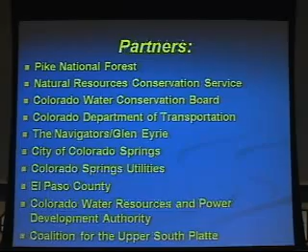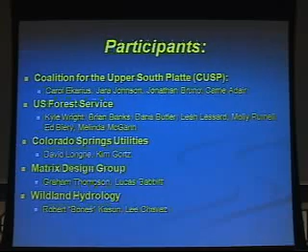So we want to thank those who have made it possible to do these studies and to bring the combined expertise, information, and experience that we've had over the years to your area and your watershed. Also in the field, the people who helped us, especially associated with CUSP, U.S. Forest Service personnel, Colorado Springs Utilities, Matrix Design Group, as well as Wildland Hydrology. These are some of the additional names, some of them sitting out here right now, who put tracks up these channels and hillsides to help put a lot of these numbers together.

As you know, we're looking at a little over 18,000 acres. You're all familiar with the degree of severity and the impacts. Our goal of the assessment we did initially, and then the subsequent conceptual design we're going to talk about today, had to do with enhancing the hydrologic recovery of the watershed to promote sustainable watershed function, trying to speed up recovery as well as reduce some of the anticipated impacts, some of which you've already seen.

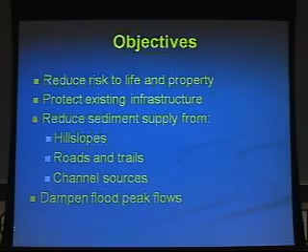The key or specific objectives associated with the design are based on reducing the risk to life and property, protecting infrastructure, reducing sediment supply from hill slope processes, from roads and trails, as well as the channel process, and trying to dampen flood peaks, reducing the magnitude of that big runoff response to just moderate precipitation events that we've already seen.

So the following questions - anytime you're involved in this type of work, a lot of questions come about: what, when, who, why, and all this stuff. I'm going to try to answer these questions as I go through a series of slides that will give you some background in terms of where we started, the questions that were addressed to us, and how we've gone about data collection and analysis to come up with some answers. Some of these questions are not simple.

So the first question: what are the impacts and potential adverse consequences associated with post-fire conditions? Second: what can we do to offset some of these problems? Can we do anything? What kind of treatments? Number three: how effective is anything we do going to be? Is it going to work? Next is, where do we start?

We've got 18,000 acres. Do you start at the top of the watershed, the furthest one north? How do we make that determination? Next, how much is it going to cost in terms of an approximate unit cost for different types of treatments or activities we would anticipate? And when can we start?

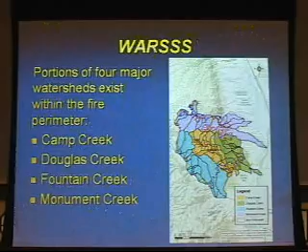The WARSSS analysis identified 4 major watersheds, which we broke up into sub-watersheds: Camp Creek, Douglas Creek, Fountain Creek, and Monument Creek were the main broad watershed basins. Within each of those basins, there are 89 sub-watersheds broken up, involving over 237 miles of stream channels, of which a majority were hiked and mapped and assessed in detail. We'll talk about more of that as we continue on.

Some of the change we've seen already associated with the hydrologic response: we're finding that just moderate storms, like a 2-year precipitation event, can generate a 20, 30, or even 40-year flood because of this response, which is alarming, as it should be. That's one of the things we have to address dealing with some of our treatments.

The effects of mud flows and sediment, as well as floods coming down into your neighborhood, have prompted a lot of direct issues, as they should, which again prompted a lot of our studies.

The average annual water yield - Jim Nankervis ran this model looking at the effects of change in stand conditions, how much of the watershed was burned and what was hot burned. So we actually look at the change in water yield as a result of the fire effects. As we increase water yield and increase flows, we have to look at the conveyance system, the stream channels, as well as rills and hill slope process that have to accommodate the increased flow.

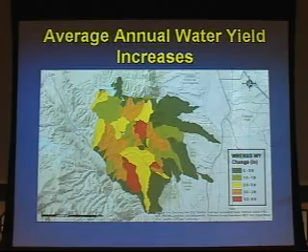The thing we found in our studies and evaluation, and other people, including CUSP, who have evaluated 10 years of post-fire impacts on the Hayman fire, have found that the impacts persisted a lot longer than what was anticipated, or that they were told that within 2 to 3 years it should be back to normal. Of course we found out that's not the case, because the increase in flow is going to last decades - maybe 70 to 80 years before we get back to pre-fire conditions, because of the drouthy nature of these soils and your precipitation within this area.

It's hard to get the site back in terms of mature conifer tree cover. The point is the increase in flow is going to be with us. It's not going to change a lot. The flood peaks are a reality for the future.

We can do the most by seeing how well the stream channels and the land system can accommodate the increase in flow. Where we can, we're figuring out some techniques to try to dampen the flood peaks for the more frequent floods, which we've already demonstrated and validated will work. So we'll show you some of that information coming up.

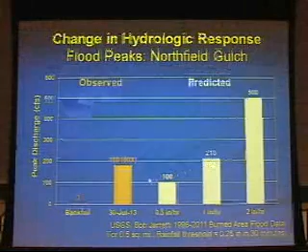The good news, not that it's good news exactly, is that the models predicting runoff response are actually quite accurate, because the observed values were pretty close to predicted. The same 1 inch storm would have generated about 210 CFS, and we observed about 180. That's pretty good agreement.

Not that that's good news, but we have to deal with the knowledge that not-so-big precipitation events can generate big runoff. This is a very key point, because 10 years after the Hayman fire, 86% of all the sediment continues to come at an accelerated rate, causing downstream damage, flood issues, and maintenance problems on highways, and the list goes on.

Those increases were related about 86% to stream bank erosion, from stream channels that have been incised and are blown out and continue to contribute sediment. So the channel process becomes pretty important, and it's something we can help with, in the presence of long-term increases in flood peaks that are going to be with us.

It was up on Coal Basin Creek in Colorado. This is a big debris flow, not from a fire, just a natural process. Now we're going to have an acceleration of that natural process because of what's happened to the vegetation. The thing is, it takes a great mass of material instantly, which is very hard to predict.

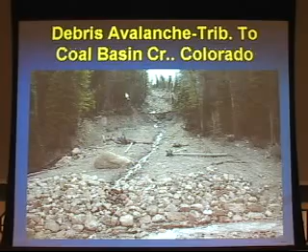Hill slope processes we're going to talk about now relate to surface erosion, rills, and concentration of flows. The more rills developed on the side slopes, the faster the runoff response, which then affects downstream flooding issues as well as sediment transport. So when we're looking at surface erosion, we have to be able to quantify how much sediment is coming from this process that's influencing stream channels, flood stability, etc.

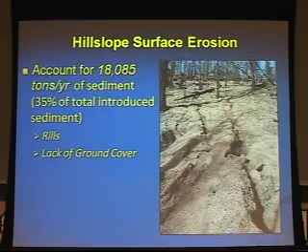So when we're looking for the summary, this is from covering a lot of country, looking at a lot of aerial photography and post-fire analysis. We found that as a result of the work done, 18,000 tons per year of sediment, and that's not with a big flood, that's just normal runoff, normal precipitation events, associated with 18,000 tons over the 18,000 acre area, from rills, concentration of flow, downstream and downslope, and lack of ground cover or surface cover, exposed soils.

So this is some of the numbers that relate to tons from hill slope process by location. The Fountain Creek drainage had 7,300 tons, about 40% of the total of all watersheds. Camp Creek had 4,193 tons, from hill slope process only, 24% of everything. Douglas Creek had 22% of hill slope process, or 4,000 tons. West Monument had 2,500 tons, associated with 14%.

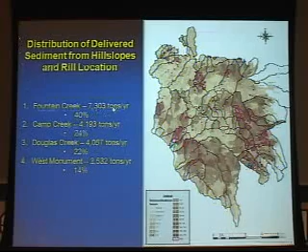Now, these are delivered tons, not just erosion on a slope, but the amount of erosion routed and delivered to a stream. To give you an idea, 7,000 tons is about 730 ten-yard end dump trucks leaving the watershed every year. So this is not just a small number, it can be quite significant, and we have to be able to address these processes as well.

Also, these are mapped areas of high rill densities. These are areas where we see, and the red gives you the highest tons of sediment yield from hill slope process. Why this map is important is you're going to see the distribution of where the sediment's coming from, by different locations and different processes.

This becomes critical because you can go back by individual watershed, by location, and identify where to concentrate your energy. If you can't get equipment on the slopes, you're putting hand crews out there, and you can't just do it on every acre. So this prioritizes what acres are the hot spots, which ones have the highest sediment contribution, where we may be most effective for treating those acres.

So we have this distribution mapped to give us a pretty good idea. The colors you see, the lighter tan as opposed to the darker tan, have to do with the rates. The darker the color, the higher the tons per year of sediment supply by location, by watershed. There's a lot of effort into this, but it becomes extremely valuable when someone is setting out with a hand crew to know where to go first. We'll discuss this later as we talk about some different treatments we would recommend to be effective.

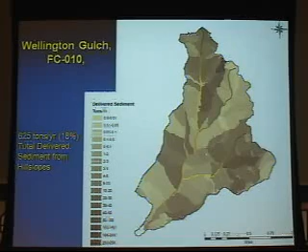Wellington Gulch is located right here, just above Highway 24. Looking at the data for the hill slope process for Wellington Gulch, we got 625 tons per year, about 18% of the total delivered. The color tones you see are identified within this sub-watershed showing where was the highest risk and highest amount of tons per year. Those are areas with either lower slope position, closer to a drainage network, very steep or erosive but high rill density - the higher red flag areas. If we're going to do something there, dealing with 625 tons, at least we know where we can be more effective at a given location within that watershed. This will be helpful to those implementing a lot of the treatments we are recommending.

Debris flows are a type of process, like the picture I showed you, where a whole mass of sediment comes down at once, like mud flows, debris avalanche, and debris flows.

There's no way you can go up in a debris avalanche system that's 70, 80, 90% side slopes and steep gradients and put in check structures. People have tried that. It never works. It's very costly, it's high risk.

What we have to do, and which we're going to get to in a little bit, is from a geomorphic standpoint, there's natural features of alluvial fans of how Mother Nature took care of 100,000 cubic meters of material by spreading it out and making a landform as a fan. It fanned out and deposited, before it got into the main trunk river and filled it up.

So these are things we have to keep in mind because what we develop and what we work with is natural systems and geomorphic landforms. We try to mimic things that are naturally stable rather than muscle up on everything, which is very expensive but sometimes works against the system. You'll see that as we go further and develop some of the different scenarios for the designs we had in mind here. And these are probabilities.

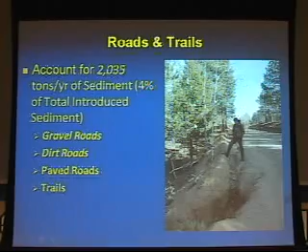You can see here where some are straddling the ditch, you can increase runoff just like a gully right down these roads as well. So we're going to be making recommendations on dispersing runoff rather than concentrating it, and reducing some of the risks and the conditions we've already observed out there.

Now this is from a model that was empirically developed from actual delivered sediment, not just erosion of a cut bank. This is the amount of sediment that comes from the road that gets to the channel. There's a lot more erosion that goes on in the road. This is only the delivered sediment, and that's important because a lot of you are on the receiving end of a lot of that sediment.

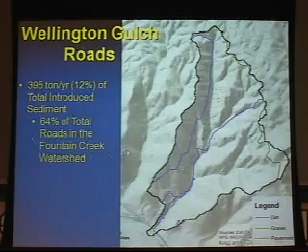Wellington Gulch, again we're going to zoom in on a little different scale so you can get a better idea of the mapping. The purple is the mapped roads. On Wellington Gulch we had 395 tons, or about 12% of the total introduced sediment. And that's 64% of the total roads in the Fountain Creek watershed are from that particular contribution from Wellington Gulch.

Stream bank erosion, another process. This is big. In what we found on Trail Creek, in our studies on the Hayman Fire, 86% of all the sediment, total sediment coming off that whole fire, was from the stream banks themselves, which added to land loss and increased sediment delivered downstream, and loss of function of the streams besides. So bank erosion is what we call significant.

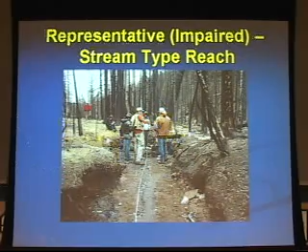We looked at a lot of areas that were representative reaches, meaning typical for a given stream type in a given valley, that we then characterize and get detailed information on, including erosion rate in tons per foot per year. We can extrapolate that to the same stream type elsewhere. This is a typical entrenched, impaired stream type on Northfield Gulch, a tributary to West Monument Creek, where we studied bank erosion, sediment transport, and hydraulics, looking at hydraulic relations, morphological relationships, and sediment. We camp there, get detailed information at a given location, and extrapolate that data to other similar stream types elsewhere.

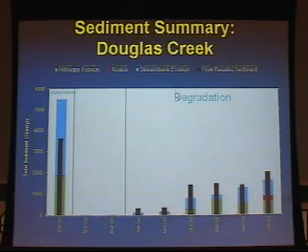So again, there's a lot of stuff here. I'm going to try to go fairly rapid to cover enough of this to give everybody an understanding, a feel about what we've learned.

This is Douglas Creek. You can see the sub-drainages here contributing, again, mostly degradation, excess energy, high transport of sediment. That's going to go down somewhere, and we know where it's heading. So this is why we're urgent, as well as you guys, thinking about what can we do about this.

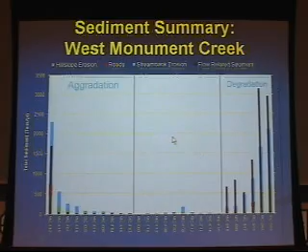West Monument, there is data in terms of the sediment consequence on West Monument and the tributaries. This is the cumulative sediment sources. What you're looking at here is the total associated with Fountain Creek: 19,000 tons, 37% of the total.

Camp Creek is 11,694 tons, 23% of the total. Douglas Creek is 20% of the total, or 10,400 tons. West Monument is 10,000 tons, or 20% of the total.

Now, the way you look at this color code, this overlays the hill slope process. It's light tan to darker brown — that's kind of the hill slope. But if you look at these lines here, as you get further downstream, you'll notice how the colors go from green to yellow to red.

Well, that's how many changes in tons you're going to generate within that watershed. So for any individual sub-watershed, you could go to any location and get the tons as a result of hill slope and channel process and flow-related increase. That's pretty powerful because this tells you where some of the highest sediment producers are that demand maybe a higher priority associated with treatment. So, what are the consequences?

So what? I know we've had previous sessions and people say, well, why are you worried about sediment? And a lot of times people say, well, let's just have a flushing flow, and that next high flow will flush all that sediment.

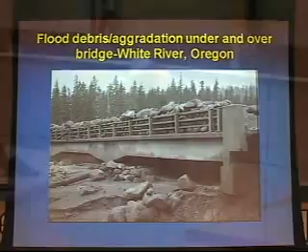Here you've got deposition on the bridge and under the bridge. This is from a big flood in Oregon, but sediment is a big issue in terms of maintaining flood capacity and reducing flood stage. Because one of the things we've finally got a handle on is how to predict sediment. It's taken me 48 years in this business to finally get to that point, and we can predict it accurately.

If we don't understand sediment, and we're just dealing with clear water discharge, that's only half of the battle. We've found that we lose more bridges and more culverts, and add to more flood stage, because of sediment we can't take care of. So it is an issue — we've got to look at keeping it in the watershed and not having it all delivered down country.

This is deposition in one storm on Trail Creek from the Hayman fire that filled 5.8 feet of deposition just in one runoff event. So the top of a 6-foot box is what you barely see sticking off that sediment deposition. They had to put culverts across here to try to get some drainage.

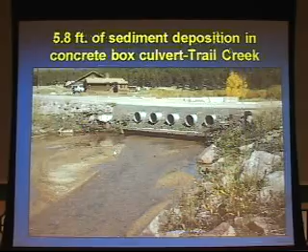So again, someone didn't understand sediment transport when they installed that structure. Also, this is on the recession limb of a flood, showing how much deposition occurs in a high width-depth ratio environment, which adds to flood risk because of the sediment. So it's not just the discharge, it's both.

I wanted to show this picture of a guy who thought he wasn't much of a flood risk up on this high bank. Well, guess what? The bed raised up about 4 feet, and now that guy's in the active channel. This is the problem with sediment aggradation flood risk.

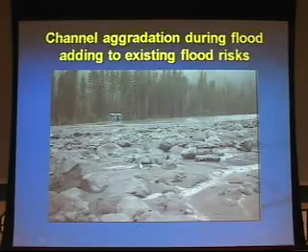We've got to understand how we can reduce sediment, but in the presence of sediment, how can we route it where it's available? It's a natural process, we're just an accelerated natural process, if you will. So we've got to figure out how to route sediment to keep our flood capacity and flood stage down. We've been doing a lot of work on that.

So the consequence of flood stage has to do with excess sediment deposition, loss of riparian vegetation, and flow resistance. This adds to a lot of flooding impacts. If we take out the vegetation along the banks, that's our flow resistance, which maintains a low width-depth ratio, narrower and deeper channels.

But if we take out that vegetation, it widens the channel and induces more deposition during the flood, and then you've got a problem because you've raised flood stage. So vegetation is very important to maintain river stability and bank stability, as well as not adding sediment to the channel, and maintaining velocity distribution to keep flood stage where it should be.

Land loss, property damage, again stream bank erosion, lateral adjustment - long-term problems we've seen in this county and elsewhere in the state and throughout the country. So the good news is we can do something about it. Long-term instability and loss of function.

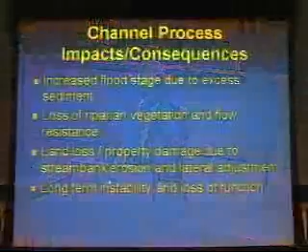So again, when we have unstable channels, we have high bank erosion, rivers that are down-cutting. As soon as the stream incises and abandons its floodplain or its surface, all the high flows coming at you are banging against the walls. There's no relief, so that's where we get this accelerated sediment from the stream banks and the bed, the downcutting.

This is just a diagram recently put together to show flood stage change due to sediment. The sediment we're looking at here is that if we maintain this cross-section of width, depth, and velocity, you can move the sediment without really affecting this particular flood stage of a flood-prone area.

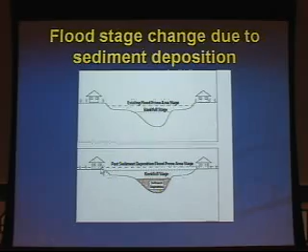But as soon as the bed elevation comes up and we start to aggrade the channel, then everything comes up, including the normal high flow stage. Now we're raised up for the same discharge - we're at a higher stage, and that puts people in flood risk with a lesser magnitude flood. So you've got to deal with sediment.

Next big question: so what? I see a lot of thousands of tons, I see a lot of bank erosion problems, you've got pictures of stuff that looks pretty tough to take care of. The question is, what can we do? What direction can we take? Can we offset these adverse consequences or impacts? So that's the next question.

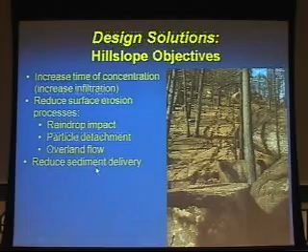If we look at our hill slope objectives dealing with trying to reduce sediment: increase time of concentration, basically slow it down, try to get more infiltration into the soils, reduce surface erosion processes with more surface and ground cover to reduce raindrop impact, particle detachment, and overland flow, the development of more rills, and reduce sediment delivery. Those are the objectives for the hill slope treatments.

Some of the things we've talked about here is adding ground cover, because once you get about a 50 to 60% ground cover, research that Robichaud and others have done on the Hayman fire has shown you get about a 95% reduction of surface erosion.

So that's pretty good information to know. If we can do things with mulch, with roughness, different treatments, including log sills and other things we'll talk about, to discontinuously plug rills. You can't go in there and plug all rills, but if you do it discontinuously, it breaks up that continuous length of slope.

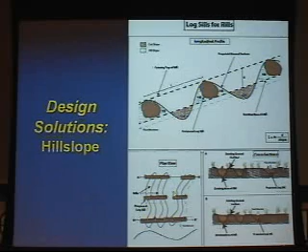That adds to building up that head and adding more erosion. These are some of the design solutions which are in our conceptual design. These are log sills, so we call them sills for rills. Basically what that is, we put these bedded so that they intercept any water that concentrates down the rill, and they'll slow down that, induce deposition, create infiltration, and reduce velocity and reduce downcutting further, because a lot of rills become gullies.

So basically that's what the plan view, the cross-section view of these look like, as well as the longitudinal profile view.

Also, on areas where we have very steep slopes and it's hard to get up there, we build toe catches on a bench adjacent to the streams to keep that sediment from going into the channel. These are called a log toe catch. Again, they induce deposition, which then provides a microclimate and an opportunity for seeds to establish and have revegetation. So revegetation is the long-term solution, even though that wood eventually is going to deteriorate.

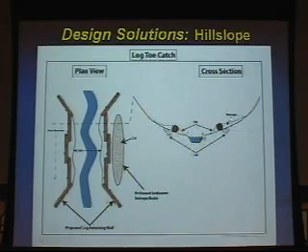If we can buy about 5 to 7 years to be able to, number one, reduce the sediment going into the stream, number two, provide a catch of fine sediment, hold moisture in that, we then have an opportunity to grow some vegetation. And it's the root mass and the long-term function of the vegetation that's going to help reduce that contribution of sediment from the hill slope directly to the streams.

Mitigation techniques are sills, log sills we just talked about, gully plugs, discontinuity to break up that continuous channel or the rills, mulch, seeding, tree plugs, toe catches, as well as a bankful bench.

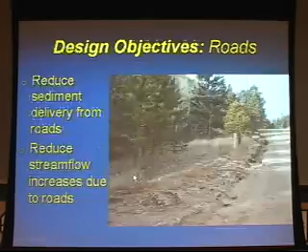Now we're going to talk about some of the design objectives dealing with roads. Roads, we're looking at trying to reduce a lot of the stream flow increases where we concentrate water in the ditch line or on the road surface or down the fills. So to do that, we're looking at putting a lot more cross drains, more frequent on the road surface, so we don't run water so far down a ditch line that it becomes a stream channel in itself.

Dissipate flow below culverts because we get a lot of those head cuts and hydraulic jumps, if you will, and we've got big scour below the shotgun culverts. Stabilize conveyance channels. In other words, some of these can start out as a gully right below the culvert and they continue, so we're going to have to look at stabilizing some of those channels.

Address unauthorized road usage, which again occurs. Challenge for the Forest Service. Relocate high-risk roads. In other words, some of these are right in the bottom of the stream, and we're going to have to look at alternatives because they can't occupy the same place. Stabilize decommissioned roads better than what's been done with just a gate. That doesn't necessarily close roads because people know how to get around gates that we've been seeing.

Here's a case for what we recommend. We've done these in the past. We'll actually take a road that's not being used, it's not needed, and we actually pull that material, the fill, and put it into the cut bank. What it does, it makes such a side hill that the four-wheelers don't like to get on it because it'll roll over.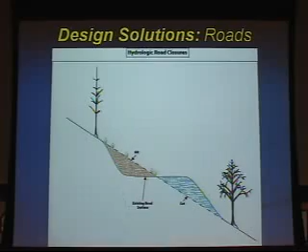What's neat about that is, let's say you had a fire. If you ever had to need that road again, instead of having several years of subsurface flow interception, all that disturbed area, the compacted soil, the difficult revegetation, you can actually go up there and pull that cut material out of the cut bank, put it back on your fill, and use the road. So 20 years later, if you have to go in and do a timber harvest or whatever, you haven't lived with 20 years of road sediment contributions if you don't need the road in the intervening years.

Now we're going to talk about channels, channel process, channel restoration. These objectives are primarily to look at increased natural sediment storage, because there are certain systems associated with alluvial fans or alluvial flats that you want to have deposition on.

Not perennial streams, but ephemeral systems in certain valley types. We also want to reduce stream bank erosion, reduce channel incision or degradation or lowering of the channel bed, and dampen the flood peaks, slowing things down with this design. We're going to look at reestablishing riparian function, reestablishing the vegetation, which is very important for long-term stability of these stream systems.

Reestablish channel connectivity. This is one thing we found on Trail Creek and in our studies on the Hayman fire: when streams downcut, they abandon their floodplain or alluvial fan, a surface that naturally disperses energy. So when those streams downcut, there's no escape, and we end up with tremendous erosion and channel enlargement with every subsequent flow. This is a long-term serious problem, so reconnecting these watersheds back to those surfaces gives the stream a natural place to disperse energy.

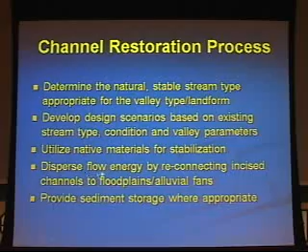We then use native materials for stabilization - vegetation, trees, or whatever rock we have locally. We also disperse flow energy by reconnecting these incised channels to either alluvial fans or floodplains. We try to provide sediment storage where appropriate, because the more we can store appropriately in a stable manner, the less we have to deal with down country.

You're going to see some maps that say A, B, C, D - these are designations of a stream classification system that I developed several years ago. This denotes gradient, width-depth ratio, whether it has a floodplain or not, and the morphological characteristics of stream channels. We know that in the basins studied, every one of the stream types shown here are ones I've found throughout the world. I haven't found any more than those major types.

The only one not present is the anastomosing, or DA type. All the rest of those stream types occur out there on the Waldo Canyon fire watersheds. But they're different streams - they offer different hydraulics, different morphology. You can't make them all the same. In other words, you have to understand what the stream should be versus what it is. And if we're going to stabilize it, what do we do? How do you stabilize it? Do you make it straighter? This has been the problem.

We've been forcing a lot of our systems, these stream channels, making them too straight, putting in levees, oversizing them in terms of width, trapezoidal channels - and that's not the stable form. So one of the things we've got to be clever and a lot smarter about is working with the system, with the central tendency of rivers that will want to be stable.

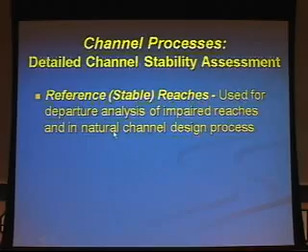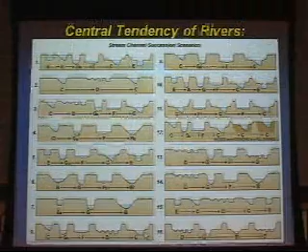Now, in this case, if you want to take a few minutes and memorize all these different scenarios - I just showed this up here to give you an idea. These are 16 different stream succession or channel evolution scenarios that we have data for. These are actual rivers, this isn't hypothetical. These are rivers that start out as a certain type, and because of impairment or disturbance, or because of climate change - as we've seen this naturally occur, but now accelerated because of fire - we've seen streams downcut. So a stream that, in fact, this is a very common one here.

If we go from a C, it started out on a floodplain. It downcut, and when it downcut, it became a gully. Then with excess energy, it blew out the banks, continued to downcut, and then widened. We had some deposition on the bed, but never really came back up to this original surface. Because of that, it couldn't reconnect due to the width constraints of the valley or slope. The stable form turned out to be a B stream type - little c means less than 2%. But the point was that ended up to be a stable stream type.

Why that's important - a lot of times in development in these watersheds, people have made a camp on an area that used to be a floodplain, and the stream downcut. So you can't always raise the channel back up. For example, this scenario would have been raised back up if we said, hey, let's just put it back up on that surface - well, that adds some flood risk. So what we find is that you can have a stable stream that has some lateral constraints, that still has a flood-prone area, and can be stable - just like the reference reach B I showed you earlier on West Monument. But you'll notice not all streams have the same scenario.

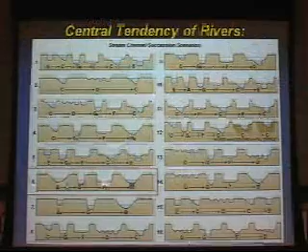We're going to go through an example of a stream successional scenario 6. You start out as a B, which is a pretty stable stream, but because of fire or straightening or whatever, the stream downcut. It abandoned its flood-prone area and widened to an F. Both banks are eroding, contributing exponentially more sediment. In fact, an F channel produces 4 orders of magnitude more sediment in tons from stream bank erosion than the B. Same flow, same valley, different stream type.

So it behooves us then to think, well, maybe we better go back to a B again. That may be our reference reach, our target, our potential.

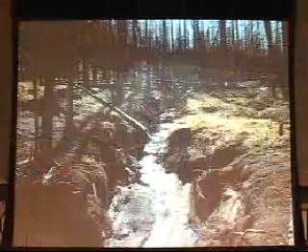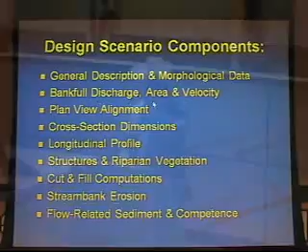So we have to have the morphological data—the slope, the width, the depth, and sinuosity, all that. Then we have to know the bankfull discharge, which we develop curves for by drainage area. Plan view alignment, the geometry, typical cross-sections, long profiles, the riparian vegetation that presently exists, cut and fill computations, stream bank erosion prediction, and flow-related sediment competence—the ability to move large sizes, or capacity.

So we develop the models to predict all this for a given location where we have this data. Then we can extrapolate that condition for that stream type elsewhere, because in the 6.5 or 7 months of the WARSSS assessment and design effort, you can't do this level of detail on 257 miles of stream channel. But you can do it very detailed at a given location and then extrapolate for the same stream type, same condition, same valley type elsewhere. This helps us be more efficient.

This is a zoom in again on Wellington Gulch, showing stream types as well as condition. The poor condition is shown in red, and you can basically read—I don't know how well you can see it from where you're sitting—but you can see A's and G's and F's mapped in very fine detail on every one of these subdrainages.

These miles are kept track of by condition, and this is where we get bank erosion rate by stream type, by condition, from the very detailed work we've done that represents that condition at that location. This is why it took months of field work just to get on the ground, put your nose on it, and document your observations.

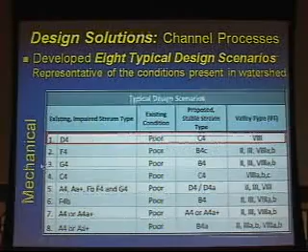This is the first of the design scenarios. We call this scenario 1: a D4 in poor condition, moving to a C4. A D is a braided channel, and the C channel is a single-thread meandering stream in an alluvial valley.

So this is a project we already did on Trail Creek. This was a braided channel with 3 feet of deposition higher than the floodplain because they had channelized it, resulting in a high width-depth ratio. Remember that box I showed you with 5.8 feet of fill? That was just downstream of this. So we had to change that stream type—because there's a house nearby, they actually had to move it up off the floodplain onto a terrace, since it had gotten filled up with water.

So basically what we did was to reduce flood stage, to reduce stream bank problems, and also this is a fishery, so we had to get migration of fish back up Trail Creek because this is a barrier. Just from a depth standpoint, let alone what's going to happen when it gets to those culverts, they're going to have to get a climbing rope to get up through and out through the culvert.

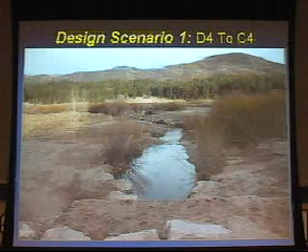So anyhow, this is the after picture at the same location. This is a C meandering stream. These willows were transplanted with front end loaders. We put in structure again to buy time to keep the stream from downcutting, dissipate energy, and toe wood along through here for habitat, but also to maintain the width depth ratio, the stability. So year after year, flood after flood, this area is not going to fill up with sediment. It's going to route the sediment through that area without contributing from its banks and its bed.

But doing it in such a way that we don't put the neighbor back into flood risk. Also, this transports 84% more sediment, running our sediment transport model, than what the braided channel would do. It also reduced flood stage by 3 feet. So it was very effective for that objective.

Next scenario is an F4 entrenched channel converted to a B4 - B4 little c, less than 2%. This is what that channel looked like. You can see the amount of bank erosion and the sediment.

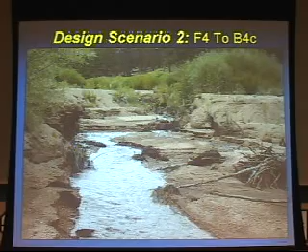And some of you, if you ever have an opportunity, if you go at the mouth of Trail Creek over by West Creek, you can just park right there and start walking upstream, and you'll see all of this work that's already been accomplished. But the thing is that you got F4 stream types here too, and you have a similar scenario that we could apply here as we did on Trail Creek for the same objectives.

So what does it look like today? That's the same location. So again, we had to narrow the stream, make a flood-prone area to increase flood capacity.

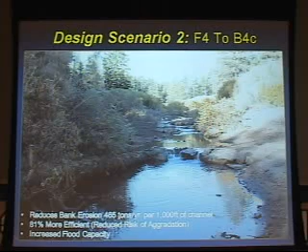Okay, so what this scenario does, by converting an F4 to a B4, it reduces the bank erosion by 465 tons for just 1,000 feet of channel. That's how much savings we have. Why this is important that we have to keep track of this is that if someone says, hey, we're going to pay you some money to go do restoration, how effective is that restoration at being able to reduce some of the problems, stream bank erosion being one of them?

So you can actually be very effective at reducing a lot of these adverse impacts. It also was 81% more efficient at routing sediment without aggradation and an increased flood capacity. That means for the same flood magnitude, the stage is going to be less. It has more capacity, because it's going to handle the sediment and doesn't add 465 more tons. Plus, it can handle the sediment from upstream coming into it, and that's why you have the problems with flood issues.

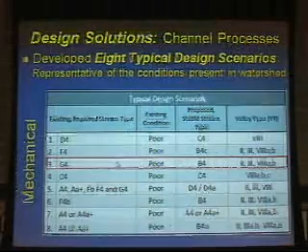The next scenario we're going to talk about is one of the recommended solutions throughout the Waldo Canyon area, where this stream type occurs and where it's appropriate and where the risk is high - a gully, or G4, converted to a B4 stream type. What that is, now you've got this gully. So what we do in this case, this was a G here, and now we made that into a B, and that's what it looks like.

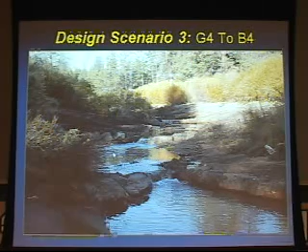Again, we used a combination of rock and logs from on site, very close. The funding of this, by the way, was kind of spearheaded by Carol Ekarius with CUSP, with also cooperators from the Forest Service, the National Forest Foundation, Vail Associates, and all kinds of people that decided, hey, this is a good thing to do, we want to be part of this. So again, another example of partnering up with other entities who want to make a difference.

This example here is reducing the bank erosion by 655 tons per 1,000 foot of channel, and reduces risk of downcutting. These are grade control structures as well as stream bank erosion reduction, and increased flood capacity. Again, this is one of the things you want on a stable channel.

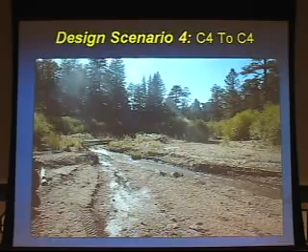These are all at the same location - you take a look at the mountain peak there, and there's the same peak. That's now created a meandering, stable, low width depth ratio, same stream type, but it's a stable stream now that'll be sustainable, but it has a floodplain, so it has a way to disperse a lot of flood energy, which is what you want.

These are grade control structures that allow sediment to transport but not contribute it from the banks or downcutting. The consequence of the change from unstable to stable C4 is you're going to reduce 40.7 tons of sediment per 1,000 foot of channel because the bank heights aren't as high. Also, 85% more efficient at sediment transport capacity using the sediment model.

So you're not going to have aggradation that adds to flood risk or raises the flood stage, which is very important. This is one that you want to pay particular close attention to, because we have been implementing this for the last few years, and it's been a very successful direction and design scenario.

This has taken entrenched, steep A channels, G channels, and F channels and converted them to a braided channel, but on an alluvial fan or alluvial flat, where the braided channel on ephemeral systems flowing only in response to runoff is the stream type. So here's a side tributary to Trail Creek that every runoff was always active in downcutting and contributing thousands of tons of sediment.

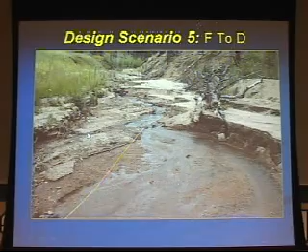So what we did - this is presently, you're looking at an F stream, entrenched, high bank erosion, you can see it's pretty obvious. This is also another picture of that same gully, if you will, but it downcut from a G, widened to an F. And basically what we did was put in a series of these in-channel sediment detention basins.

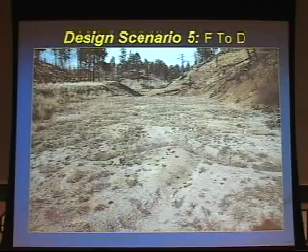The reason we needed to dig the basins was to get the material to fill the gullies, both up valley and down valley of the basin. Also, the basin stores sediment. Plus, when it does eventually fill up, we want that water and any sediment mixture to spread out over that surface and deposit on the surface, because that's an alluvial fan or alluvial flat on an ephemeral system - that's the stable form. So a D stream, or braided, can be the stable form, and we found this to be true in these environments.

This picture was taken after a runoff had occurred and you had no gullying. So we actually carved those channels to be able to disperse flow energy. What that's going to do is create more infiltration, so it slows the velocity.

The gully before, when you got the same storm, would give about 4 to 5 feet per second velocity. Now you're dealing with a half a foot per second velocity for the same water, same volume, but it's spread out over a wide area and pretty shallow. That induces deposition of the sediment, but also it slows that velocity to add infiltration, so we're not delivering as much of that flashy runoff from that previous gully down to Trail Creek.

The good news associated with that is that same storm, July 30th, that hit West Monument Creek - and the damage we saw there - it hit here too. This was not 0.5 square mile, this is about 1.3, 1.5 square mile drainage area. But the good news is that rain and the sediment never made it to Trail Creek, where before it always did, and that's why we went there, because it was such a major problem.

So what we're finding with this approach is that we're dampening the flood peaks, creating storage naturally, and not having to go back and do maintenance, because even if those things do fill - and it's going to be years - we figured some of these are going to be 30 years of life before you'd have to even worry about capacity. By then, hopefully the watershed will have receded and vegetated and slowed down some of our delivered sediment.

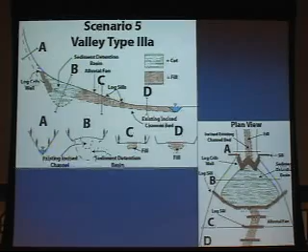Remember the debris flows, the debris avalanches? Big volume, rapid. Those you can't store in a little check dam. You can't put structures to hold back a lot of these, and if you do, there's going to be a lot of maintenance if they hold, and they're not cheap. If you can get below a debris flow and build or connect a fan function, that debris flow is going to spread out over that whole fan and just get wider.

That is key. One thing I saw following the Hayman fire, which I thought was unfortunate, was somebody went up with a dozer down the tributaries into a fishery stream, the Wigwam Creek, and cut a channel right through the middle of an alluvial fan to make sure all that sediment would go right to the stream, instead of spreading out onto the fan before it ever got there. So not only were you increasing the flood response and the peak flow, but you were routing all the sediment down that over-steepened channel.

This was not smart. I know people's intentions are great, are golden. Sometimes our performance is less than sterling because we're not quite understanding what we're doing, but we're trying to do something. So what we're trying to do is at least follow the lead of nature.

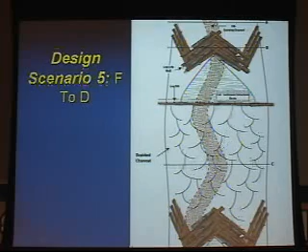This is a typical cross-section view of what they look like when you're going to fill the gully. This is a crib wall to prevent a head cut. And again, this is the braided channel associated with this particular valley. Filled gully, it's called Scenario 5.

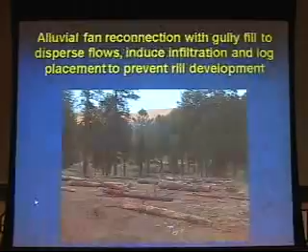So here's one right here, a gully up another tributary to Trail Creek, which was contributing big runoff. This is the depression or the debris basin that we built. That has 11,200 tons of storage. I don't know if I forgot to go back, and Brandon put that on there for me, or I think we did.

No, yeah, there it is. Forgot to. I apologize for going too fast on this one.

This particular series of 5 basins, I think that cost somewhere about $3 or $4 a ton of storage for this construction. And we did this in not 2 months, this is a matter of like a few weeks of work, 3 weeks of construction, that'll store 15,000 tons of sediment and also attenuate flood peaks. So that's not a check dam.

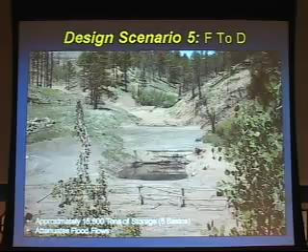Okay, that's pretty impressive. I think this is a good way to go, following natural systems. This one will store 11,000 tons. It's a fairly wide, big alluvial fan. We just filled the gully and reconnected the fan. Then when you get a bigger drainage like this, we made an even bigger basin, which is going to store 43,000 tons of sediment from the upper watershed.

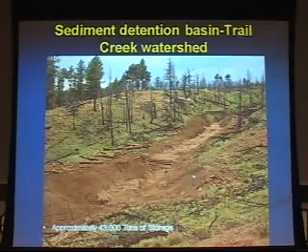Remember, this is still producing all these tons of sediment 10 years after the fire on Hayman. So a lot of people think - and hopefully you don't think - that on this fire, in just a matter of 2 or 3 years, it's going to stabilize and the problems are over. That's not going to be the case. These are some long-term problems that we're going to try to reduce some of the damage from if we can get on top of this.

This is a crib wall right here to prevent the head cut. Looking downstream, these were the gullies, and these are now filled from the material from the basin. So again, the material from the basin is used to fill the gullies to raise them back up. And the logs are there to reduce the likelihood of rill or any gullying on that new surface of soils.

So CUSP, I think, by now has already seeded and maybe mulched this particular area. This is on National Forest land. A lot of CUSP volunteers have been up all over this place seeding and mulching and helping with the revegetation, and some of the gully controls that are contributing sediment to these basins.

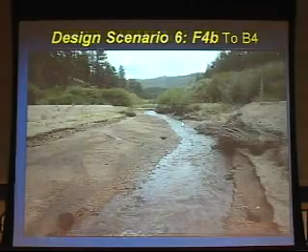Okay, this is the F4B to B4. So here's another example of conversion. Again, before and after, same place. This is Trail Creek. This reduced 465 tons per year over 1,000 foot of channel length, 81% more efficient by changing that stream type. So it's not going to raise flood stage, it's going to handle sediment and increase flood capacity.

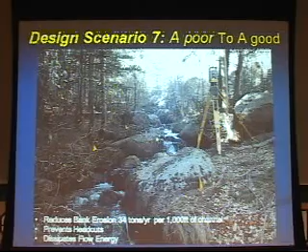Another is an A to A plus, in other words, an unstable A to a stable A. Okay, so here you can see this is contributing a lot of sediment. This is a reference for an A - it's a steeper gradient, lower width-depth ratio, step pool morphology. This is 34 tons per year per 1,000 foot of channel from this system compared to the A. It prevents head cuts as well. It's a grade control structure. It also dissipates flow energy because these are steeper gradient step pool streams.

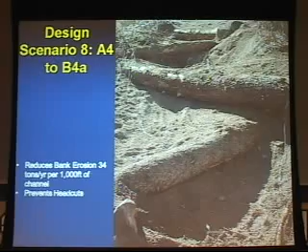And the last scenario we'll talk about is going from an A to a B little a, which you're going to have to change the shape for. So again, it's energy dissipation, grade control, log steps. Okay, that's saving - wherever you're doing this, you can actually quantify how many tons of saving for whatever treatment we're doing. Also, this stops any head cuts on those A channels that are problematic.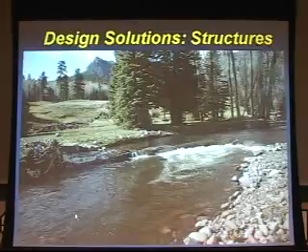But these are a grade control, step pool, cross vane system. We can use those with bridges to protect the bridges as well as increase flood capacity, which increases mean velocity without eroding banks. These are log roller structures that are grade control, similar to that picture that I showed you earlier on the A stream type. Here's a good example of a project we've done in Colorado on use of logs, steps, and rollers to dissipate energy and add grade control.

These are toe wood, and this is a structure we would use on Lower Fountain or Lower Camp and other areas where there's meandering streams with more perennial flow. Basically, we've put in root wads and cantilevered logs that add flow resistance. They don't come out, by the way, because they're bedded in deep. And we put transplants or soil wraps - basically vegetation - to add the long-term function. Toe wood is probably one of the most successful structures that withstands unbelievable floods. It gives the best fisheries, but it also protects banks.

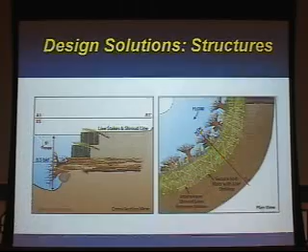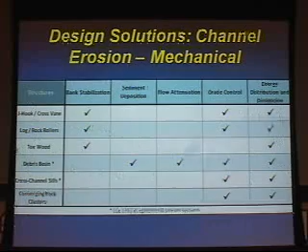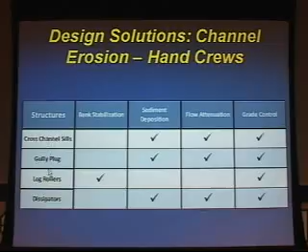So this is sediment-producing subwatersheds. Okay, those are the individual combinations of subwatersheds, at these locations.

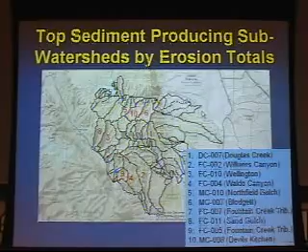This is the summary of each of those 10 watersheds: how much precip you would see for that area, the bankfull discharge, water yield change, total bank erosion rates, the actual tons per year, the sediment from the roads and the hills, and the flow-related sediment. That's how that is distributed across those 10 watersheds that are contributing.

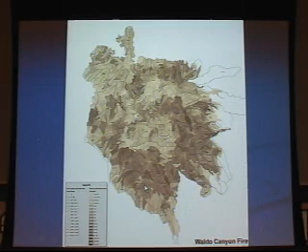Again, if you look at this, it shows you where we start, where the highest yields of sediment are, the highest surface erosion contributions from hill slope process.

We also break this up again. This shows within this watershed, these watershed combinations, if we're going to spend money for reseeding or mulching, dealing with hill slope process, rather than fly 18,000 acres - because it costs about $2,500 an acre to aerial apply seed and mulch - you would at least say, hey, these are the hot spots. You're going to find that about a third of the area is contributing about 90% of the sediment.

Now, that was an important discovery, because you can be efficient by not treating everything, but by going to those areas that you're going to be the most effective at, as it represents our map data that tells us where we've got the problems.

So the high priority treatment areas, again going back to our friend over in Wellington Gulch, are areas where we have road densities that are high or different kinds of soil conditions. This is mapped to tell you where we have the highest sediment contribution to hill slope process, so we know where to go.

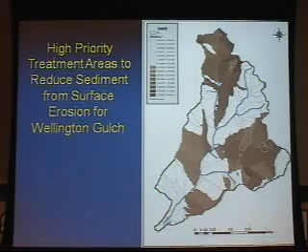This represents the top 10 watershed priorities associated with channel process, in terms of tons that are applied to treatments. I don't know if you can read this very well from where you're at, but these color codes tell you where we would do scenario 3 and 4, where we would do scenario 5, where we would actually do things by location, by sub-watershed.

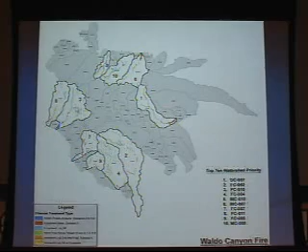Now this is the blow-up of that same thing, where you can actually look - here's a case where you're doing the single thread scenarios 1 to 4 or 6 to 8. Here's where we're going to do a sediment basin with equipment, you're seeing this red here.

We're trying to put a lot of these sediment basins down the lower end, because it's going to take some time to get up all the way through the basin, and this is a catch for a lot of the flow as well as that sediment.

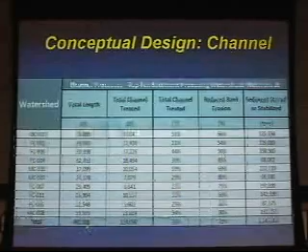So these are where the hand crews are identified, again the high-risk sites. We've actually taken the treatments and located those that represent the highest risk areas and the processes. As a result, we look at the total length of all these watersheds, total length treated, the amount of reduced bank erosion, and the amount of sediment stored related to these processes.

So you're looking at treating about 33% of the channels in those top 10 high-risk watersheds. In this case, that's taking care of about 1.2 million tons, or 73% of the bank erosion, by treating just a third. I don't know if you understand the significance of that.

That means we don't have to go out and take care of every 273 miles of stream. It tells us where we've got to go, and we can be effective at 73% reduction on just 33% of the stream length.

This is important because that's the value of WARSSS - it gives us a better understanding of what, where, how much, and so what. This helps us direct our designs.

Again, for the hill slope process, we found that if we take 53% of the area, we can actually take care of 91% of the delivered sediment. By treating 53% of the priority areas, we can take care of 91% of the total sediment.

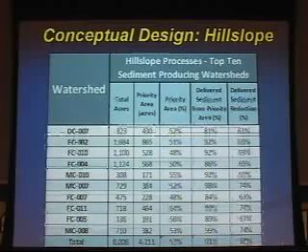Looking at the location of those 10 watersheds, treating 53% of that takes a pretty big cut on the total amount of sediment, or 69% of the delivered sediment reduction. So again, it helps us understand the distribution of this.

The next question is how much it's going to cost. All we can do is talk about some unit costs associated with this work, because we've been doing this and are getting some idea of the numbers. How many of these we do, how many crews we have out there, and what percent of the basin we treat will make a difference on the total cost. This is looking at the single thread channel restoration under different scenarios.

Costs vary from about $25 to $44 a lineal foot for our work in Trail Creek. Sediment detention basins run between $1.70 to $10 a ton of storage saved. Aerial seeding and mulching, based on some recent bids, is about $2,500 an acre. Hand crews can vary from $1,000 up to $6,000 an acre, depending on the level of difficulty, degree of work, access, and extent of work required. So it's not cheap, but at least you have some idea of the rates we've experienced.

The last question: when can we start? I know this has gone longer than I thought, but I get a little excited because these guys, and some of you others, have spent a lot of time out there, and trying to cover this in just a few hours is a challenge.

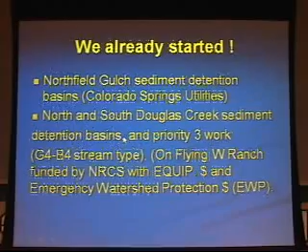When can we start? We already started. It's already underway on the Northfield Gulch sediment detention basins. I've been working with Colorado Springs Utilities, their personnel and contractors, implementing Scenario 5 already. And I've completed the design for the rest of the B channel going down and connecting to West Monument Creek, which is in that write-up.

The next is the North and South Douglas Creek on the Flying W, which we started last fall and are working on as we speak. That's been funded on the Flying W by the NRCS with EQIP money, and now also with emergency watershed protection funds that have come from Congress for this emergency work.

The summary is this: the restoration work and the things we've been proposing will reduce a lot of the flood risk from more frequent precipitation events. So instead of having a 30-year flood from a 2-year storm, we're trying to actually dampen and reduce that. However, the potential catastrophic floods, which will come based on big precipitation events, are still something you're going to be living with.

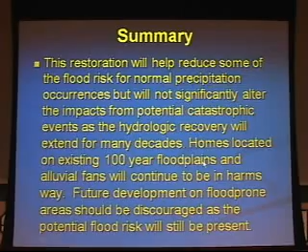So if you're camped on a floodplain, pack your bag and have it ready to go. This is not going to take away those risks. It's still going to be problematic with big floods on floodplains. This is just going to help reduce a lot of the magnitude of more frequent floods and hopefully reduce those impacts. So just know that we still have issues of risk.

And we'll end with this: some people are still at risk where they've made camp right at the outflow, a surprise waiting to happen at night. I don't know if that's you or not, but anyhow, you have now been exposed, and probably have been for some time. Thank you very much.